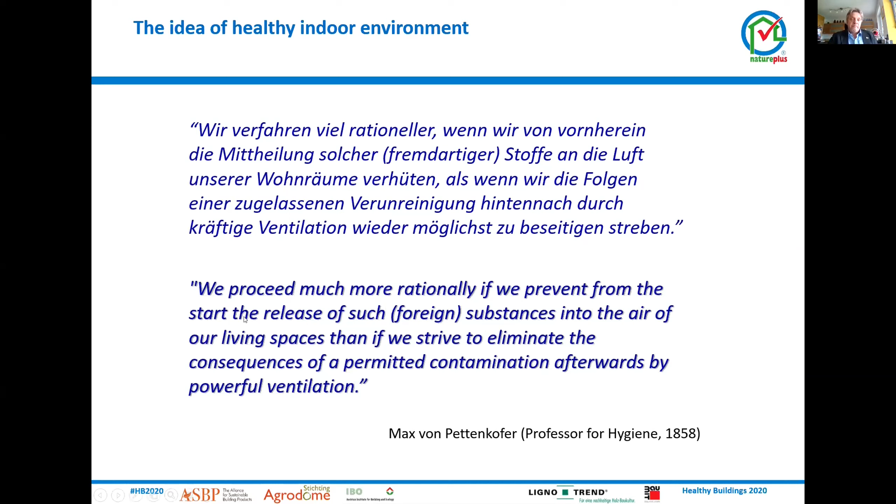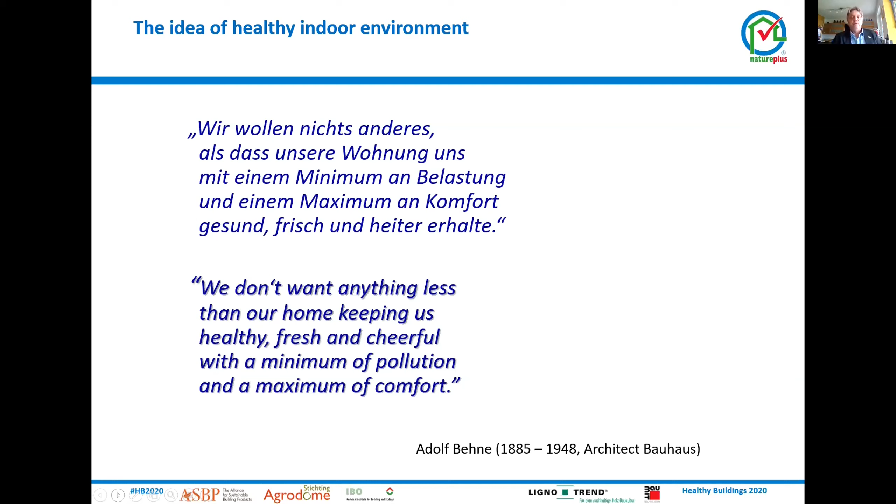So what kinds of pollution can be in our rooms? Main factors for the lack of indoor air quality can be chemicals. These are mostly volatile organic compounds. We have many lightly volatile organic compounds coming from paints and varnishes, for example. But we also have suspended particles as dust, and we all know that particulate matter coming from streets and from cars and from fire stoves is a problem too.

Radon is something which we do have in Germany, especially in certain areas, and it comes mainly from natural sources out of the earth. Microbes can be a problem, bacteria, of course, viruses, we all know that at the moment, and this is driving us very hard, but mold is another thing which can be indoors as well. Pets and pests, of course, we do have pets, and we have pests being a main source of allergens.

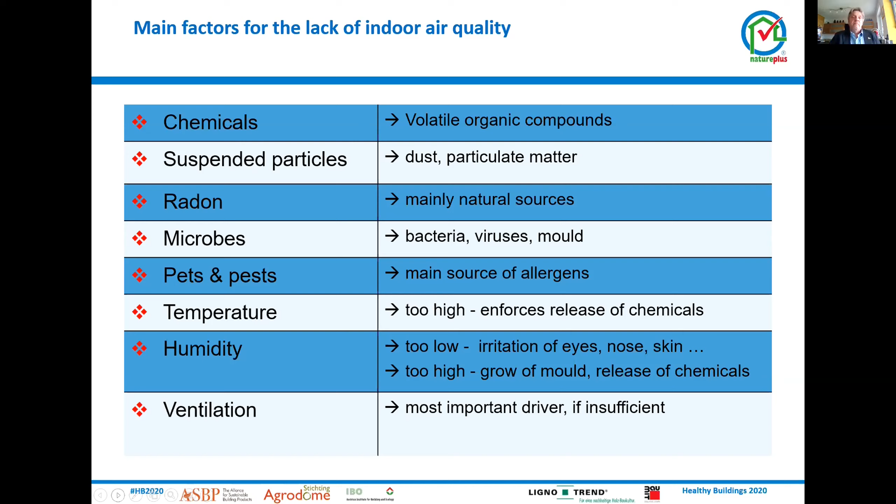Temperature and humidity are driving forces to increase the release of chemicals out of building materials. And if humidity is too high, we can have growth of mold as well. Ventilation will be the most important driver. If it is insufficient, we will have an increase in all factors of substances which are not good for indoor air quality.

Next slide, please. So what is going to be done to increase good indoor air quality? We will have to identify building materials and substances and interiors which are good for a healthy indoor air quality. We need to identify them, we need to have appropriate information on the contents of these products. We need to know what is inside a product, in furniture, but also in the building material, to know whether it can harm our indoor air quality.

Instructions have to be given on measures, how to apply substances and use the products. And we need to ensure that during construction, modernization, or refurbishment, well-trained and experienced craftsmen are dealing with that. From my work, I worked for a consumer agency in the past. We always had people coming to this organization saying, okay, there were painters in our house, and afterwards we have problems with our indoor air quality. So applying the product in a right and good way needs well-trained and experienced craftsmen.

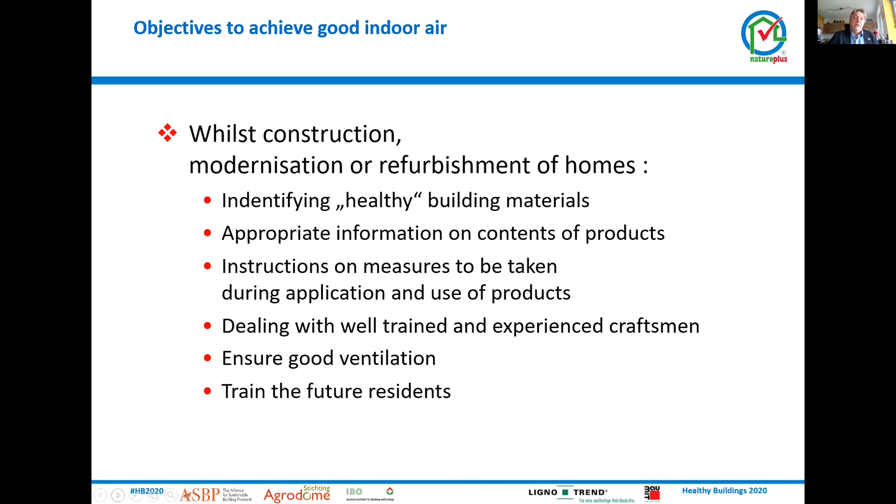So I'm sure, due to the better insulation of our homes, we need to ensure good ventilation. We heard that especially in the Corona crisis as well. Even now, getting to winter times, we need better ventilation of our homes and indoors, because the virus will be less available if we have better ventilation. And of course, residents and users of homes have to be trained how to deal with good ventilation and how to deal with the products they are using. Next slide, please.

Reality bites, what do we have? We always find polluting building products. We still have non-identified smells making people conscious that something is wrong in their own home. We do find proved contaminations in homes and in working places, and of course, due to these contaminations, there will be health risks. We still find inadequate product information so that people misuse products in a wrong way, and we have a lack of knowledge in the use of products. I spoke of well-trained craftsmen, but not always do we have these, and in the end, the citizens and users of the homes haven't got the right information to deal properly in their own homes.

So what is building products and probable pollution? We will see that depending on what kind of product you apply, there is a higher probability of having high emissions. So the bigger the surface and the more chemicals inside, the more probable the pollution. Textile floor covers, paints, and varnishes have been the most relevant indoor air quality problematic substances.

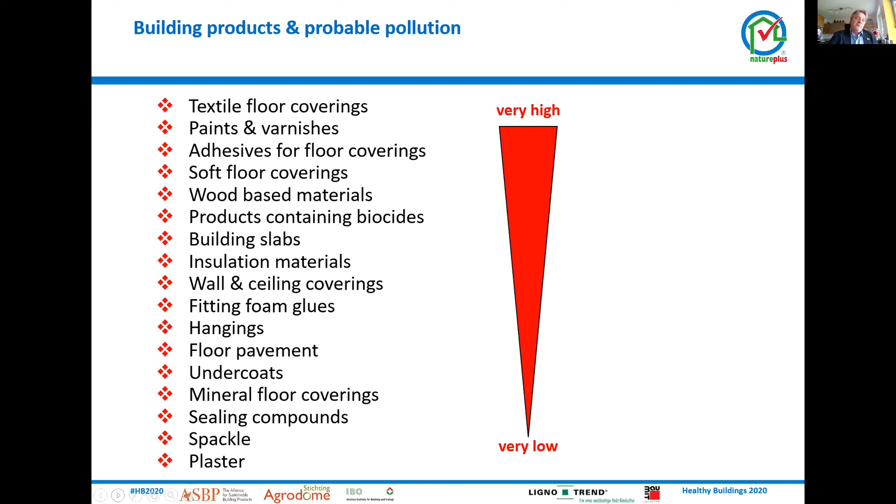So what about smells? People mostly identify that something is wrong in their house by a kind of unidentified smell. Chemical smells are always combined with the idea that it might be dangerous, while the idea that natural smells are healthy is not always true. But what we all know is that smells can influence well-being. Smells are the reason for rejection of products and for rejection of staying in a certain room. Smells are, as we've learned as human beings for a long time, mostly signals for danger.

But we should know that initial smells in the building environment are to some extent unavoidable, meaning we need certain time to ensure that smells can go down before we have constant living in those rooms. Olfactory pollution is recognized today as an important matter.

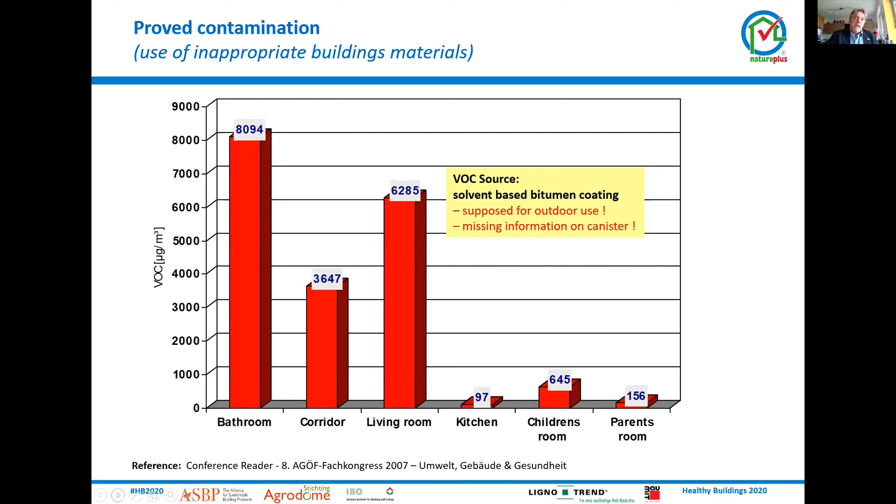Health risks are often combined with inconvenient smells. They cause sometimes non-specific symptoms, so because of the smell or because people are not feeling well, they get headaches, nausea, drowsiness, or irritation of the mucous membranes. Allergic reactions are caused by biocides, for example, but also by other products.

Long-term effects are seldom, but if they are, they're mostly connected with biocides and flame retardants in the past, because flame retardants are mostly chlorinated or brominated substances which are toxic. The problem of fear is mostly something people have if they find something inconvenient in their own homes. Fear is a main driver of a health problem.

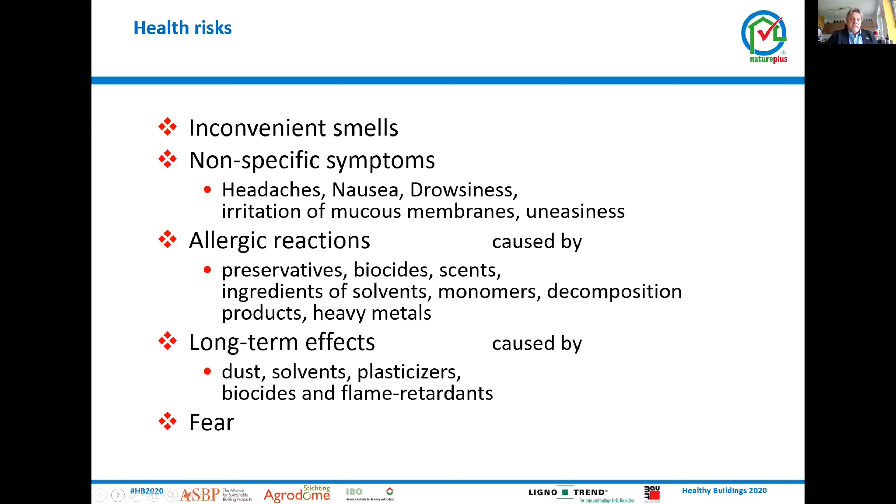During the use of building products, we have certain factors which provide pressure toward using inferior quality products. Cost pressure is something which might lead to indoor air quality losses because the wrong products are used. Time pressure and failures in construction might release substances, and the residents are not dealing well with the new environment. So if rooms are better insulated, you need more ventilation methods.

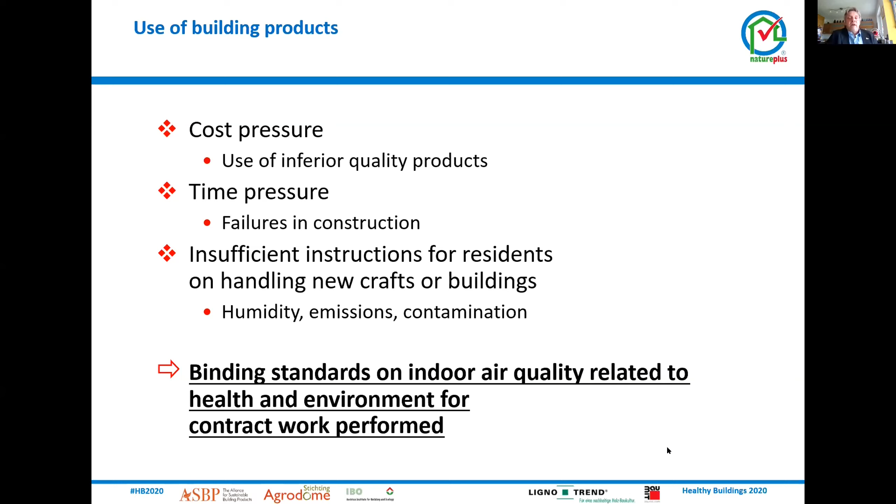So what we need are kind of binding standards for indoor air quality related to health and environment, and to include that in the contracts of the workers as well.

Product information is something which is very important. We need adequate product information so that indoor air quality problems will not appear. Safety data sheets are normally not suitable for risk assessments because people don't understand them. So the main thing is, producers and retailers need to provide precise, comprehensible, and action-oriented information to ensure health and environmental protection.

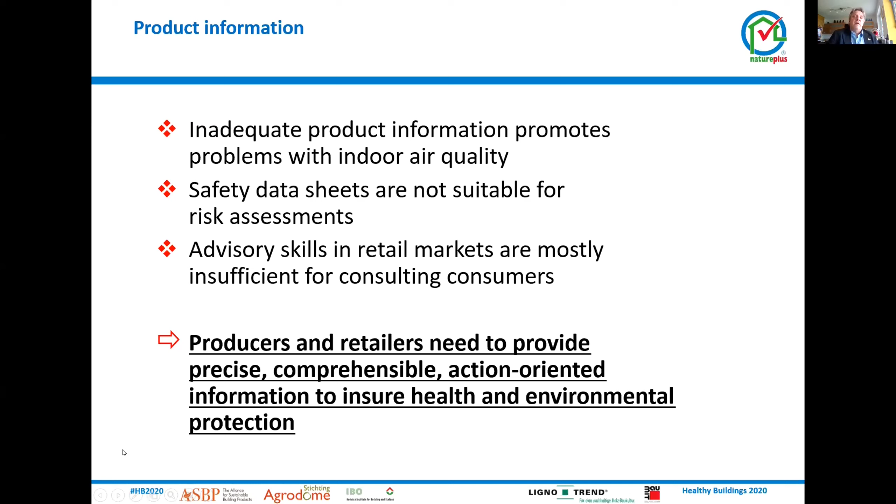So what is needed to improve indoor air? We need a comprehensive range of low-emitting building products. We need target-group-oriented information on the risk of indoor pollutants and appropriate avoiding measures. And this might be, or is, one step ahead.

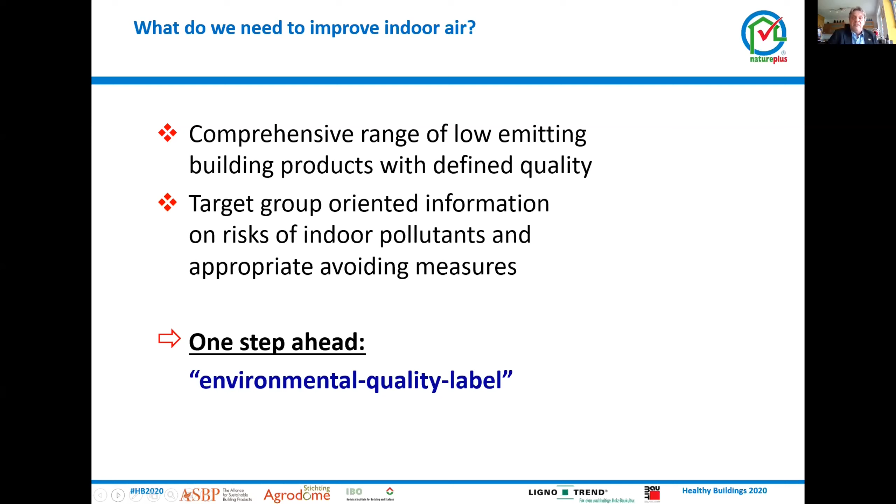A good environmental quality label will have a combination of good quality aspects, will have obligatory qualities, will have easy access to the criteria of the awarding scheme, will have reviewable and transparent criteria, will have regular verification of the users of the label and the products they provide, and will have continuous improvement of the criteria used for this quality label.

Next slide, please. You've got 5 minutes left. Yeah, but I'm shortly before finishing my talk.

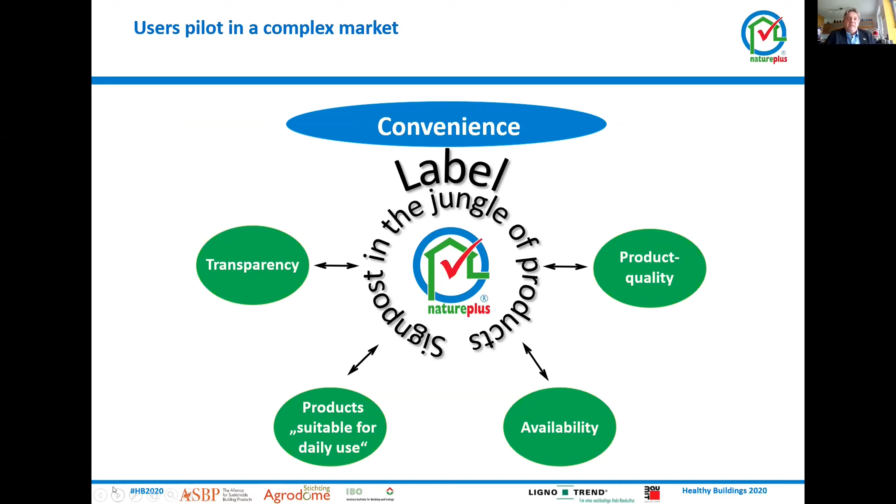Naturally, I think natureplus is one of these labels giving a convenient approach to transparency, product quality, finding products suitable for daily use, which are available on the market. Next slide, please. Thank you for the attention. So I hurried a bit, maybe too much.

No worries. Thank you very much, Dr. Buschmann, for your comprehensive overview of what healthy living means and what it includes.

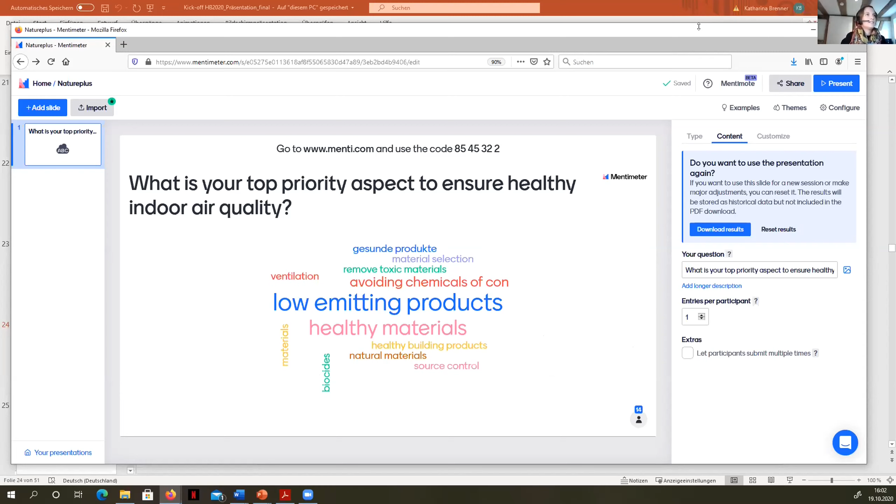It looks very good. I think that's it for the moment, but feel free to still participate. We will download the results later and include them in the presentation you'll get afterwards. As you see, there are many different aspects like ventilation, biocides, materials, healthy materials, healthy products - materials are a big topic, but also source control, which is interesting. Thank you, that's a nice overview of what's important to you.

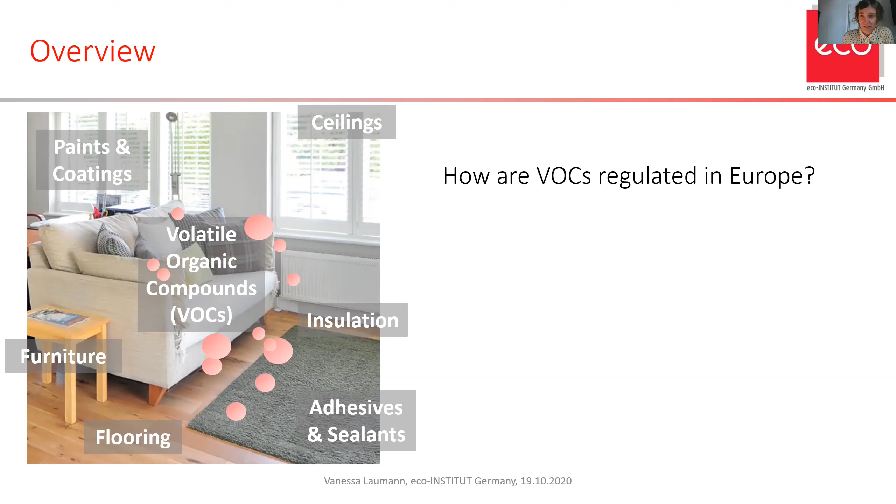Pollutants in the air have an immediate impact on health, as we already learned. So the quality of indoor air is of great importance, especially when people spend, in Corona times, maybe more than 90% of their time indoors. In the previous presentation, we learned that a major source of indoor air pollutants are building products like paints, flooring, and furniture. A major class of indoor air pollutants are volatile organic compounds - chemicals, for example like formaldehyde, that can emit from building products. In this presentation, I'd like to give an overview of product emission requirements in Europe and also in France, Belgium, and Germany - how VOCs are regulated. In the second part, I'd like to explain how product emission testing works - how we measure indoor air pollution.

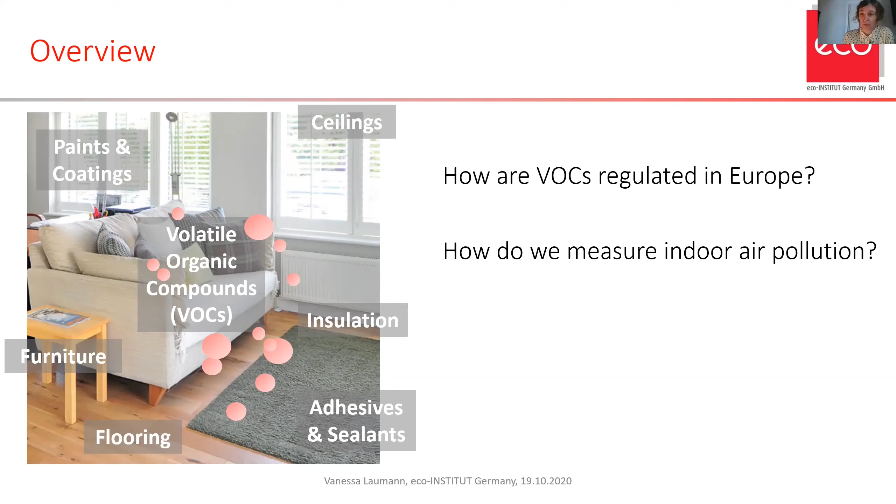A large number of countries have regulations and voluntary labels to protect us from harmful product emissions and improve indoor air quality. The European Construction Product Regulation aims to remove barriers to trade within Europe and sets requirements regarding safety. It lays down basic requirements for construction works, which must be built so they will not threaten health. In particular, emissions of dangerous substances and volatile organic compounds are mentioned, but the regulation is merely a basic framework.

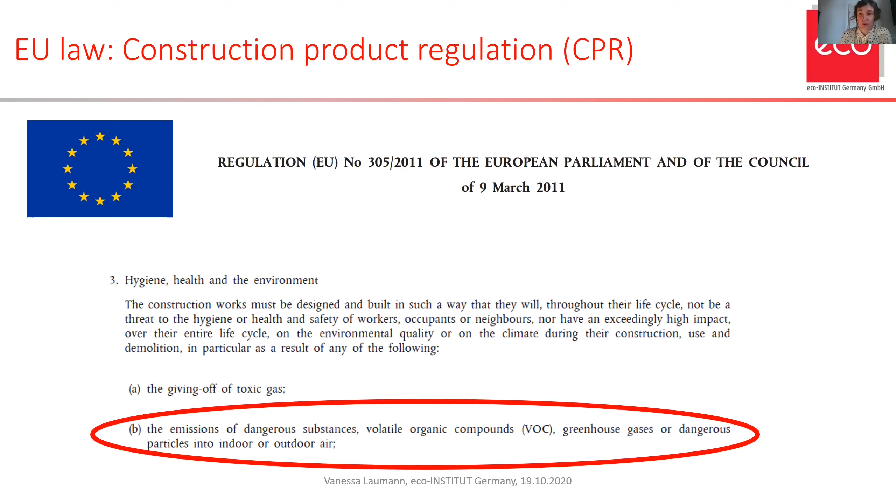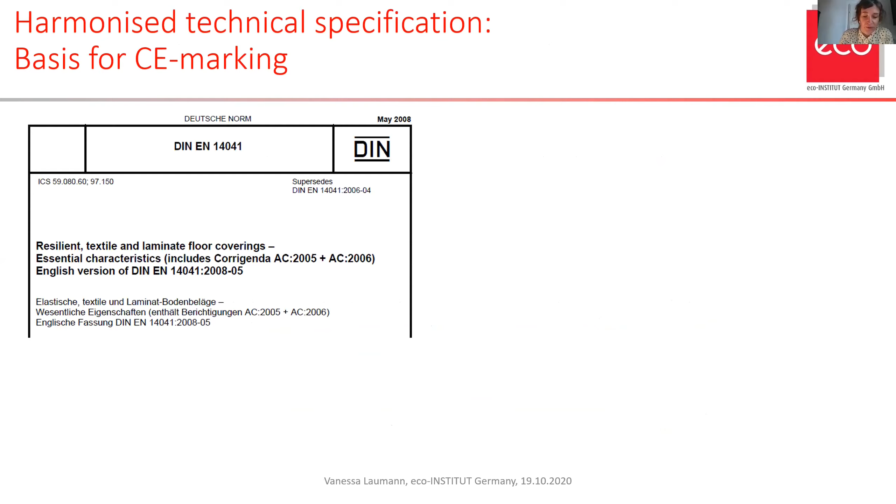The technical details for construction products are elaborated in harmonized technical specifications. Here's an example: DIN EN 14041 lays down the requirements for laminate flooring products. This is the basis for CE marking for flooring products in this case.

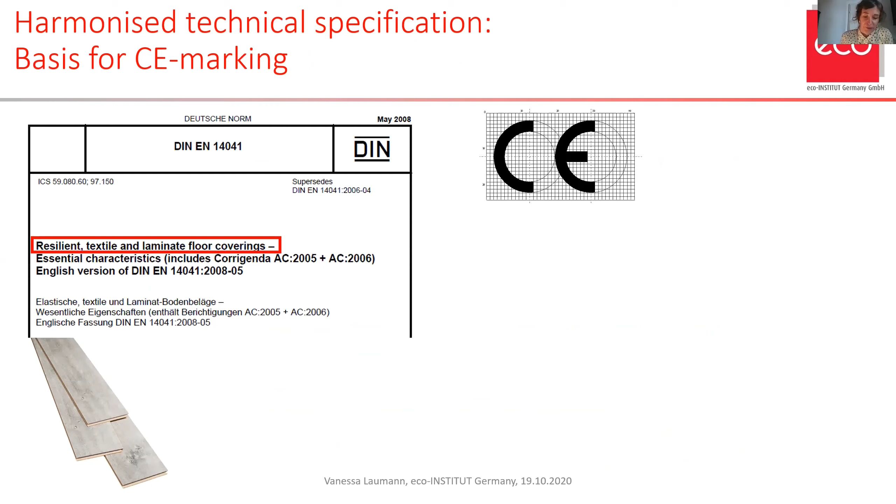For CE marking, the manufacturer always has to declare the essential characteristics in a declaration of performance. Here's an example from a manufacturer.

The CE marking is in most cases a manufacturer's declaration that the product meets EU standards for health, safety, and environmental protection. Only in some cases is assessment by a notified body required.

When it comes to emission requirements for laminate flooring products, there is only one limit value for formaldehyde that must be met and declared. The performance of other VOCs cannot be declared here.

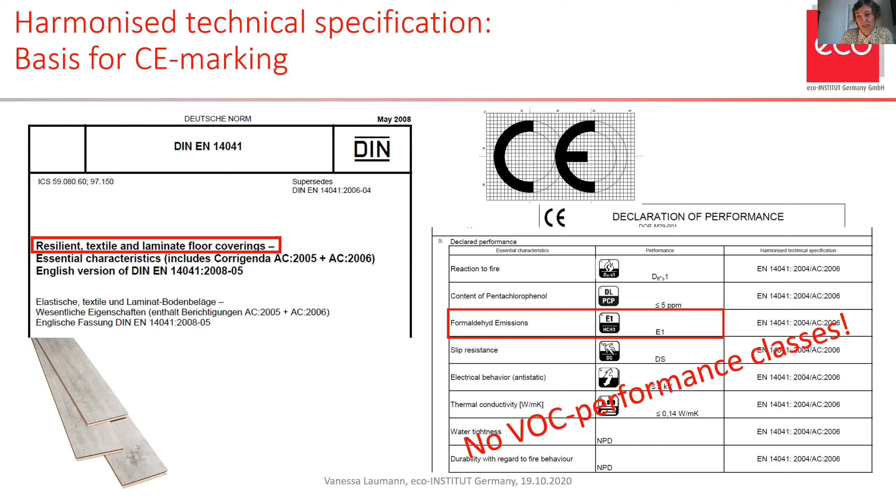So there's a gap in the CE marking standard. The declaration of performance for CE marking does not integrate health and environmental protection adequately. The declaration of comprehensive VOC emission performance is missing.

But for several years, almost all EU countries have been keen to get performance classes for indoor air emissions derived from harmonized reference values. For different products to be comparable, the VOC emission performance must be based on the same testing procedure.

In January 2018, so recently, a harmonized European method for the testing of emissions of volatile organic compounds from construction products in indoor air became available. The name is DIN EN 16516. And a recognized number of testing laboratories are already in place.

So a harmonized testing method for evaluation of VOC emissions is available and is planned to be adopted within the harmonized standards of CE marking.

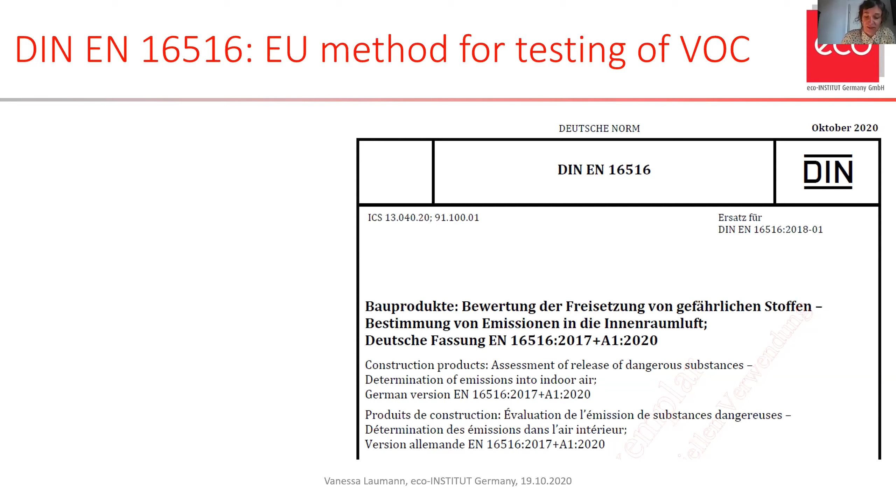But what is still missing in the CE marking and the corresponding declaration of performance is the definition of a common declaration format for VOC emissions.

The European Commission is currently working on a new classification system for rating of results of emission tests.

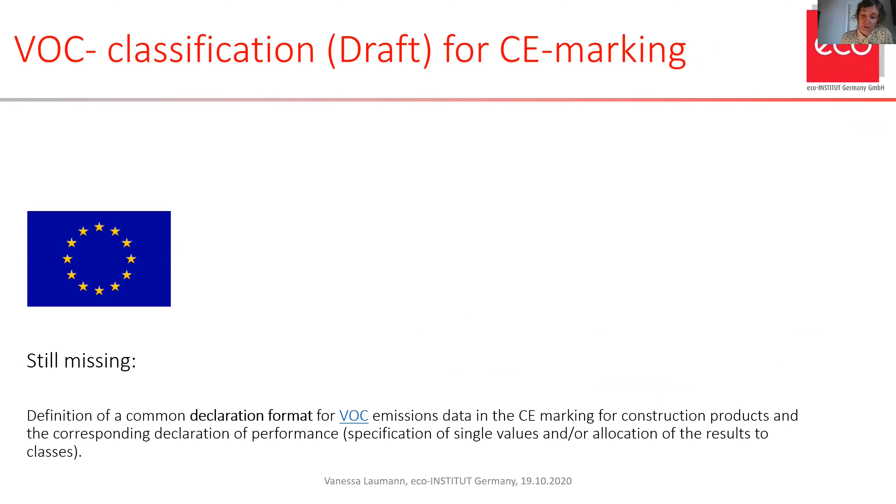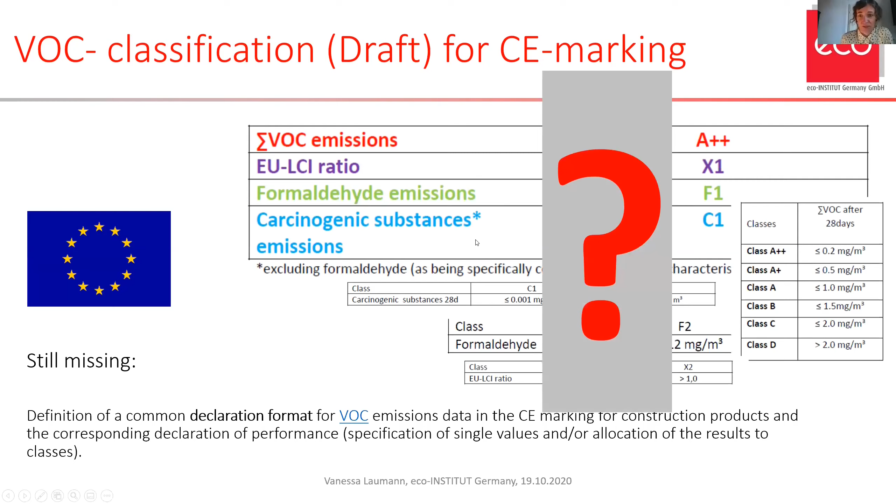It still has to be decided whether the manufacturer needs to allocate the emission results to classes - here, that was a draft, an example - or just specify single values. But it has not been decided yet.

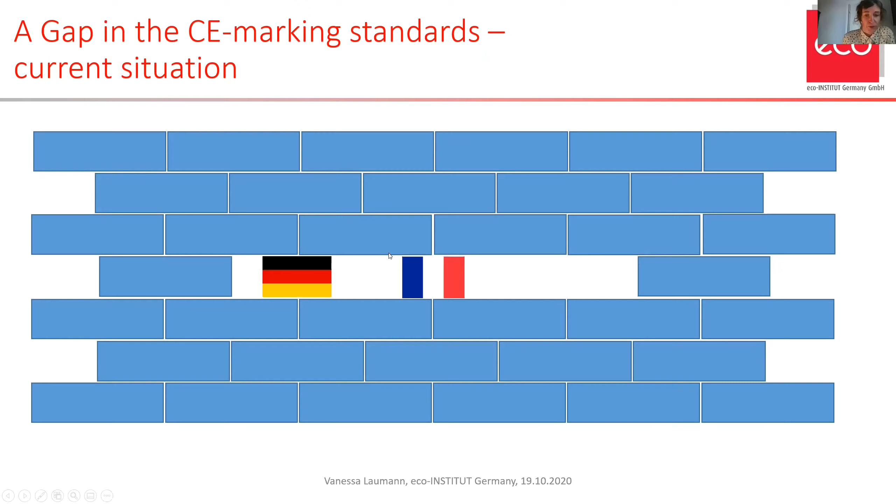So still, there's a gap in the CE marking standard. But three countries, Germany, France, and Belgium, already have VOC regulations in place. These already refer to the test method EN 16516.

Additionally, several voluntary eco-labels already refer to the test method, but requirements and limit values differ substantially.

Germany was one of the first to limit the amount of chemicals that can be released from products. Laboratory tests have to be performed according to the European emission testing method, and the so-called AgBB scheme sets the limit values.

Here's a list of certain limit values. For example, the sum of VOCs has a limit value, as well as the sum of semi-volatile organic compounds.

Formaldehyde has a limit value, and carcinogenic substances are limited. Just examples.

Some product types require an external audit, additionally, of the factory, and a sample is taken in order to control VOC emissions. These products need to be labeled with the Ü mark.

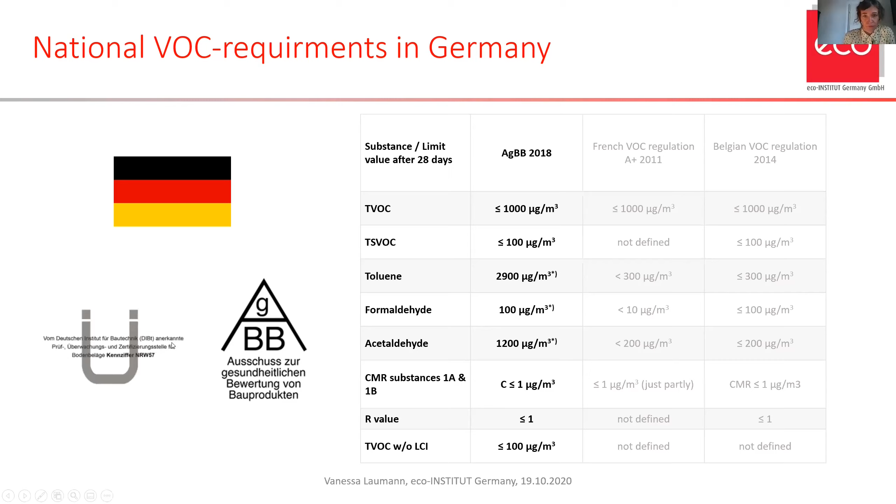The French regulation is a labeling scheme from A+ to C. A limit is set for the total amount of VOC.

You can see it in the table. And in addition, just 10 single substances are evaluated.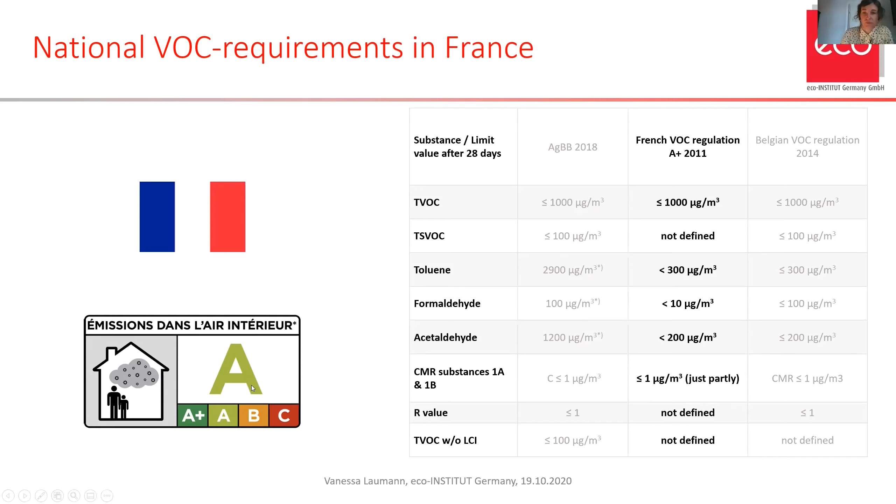The third VOC regulation in Europe became mandatorily effective in 2015 for products to be traded in the Belgian market. Emissions are evaluated after 28 days, and the evaluation is similar to the German AGBB scheme.

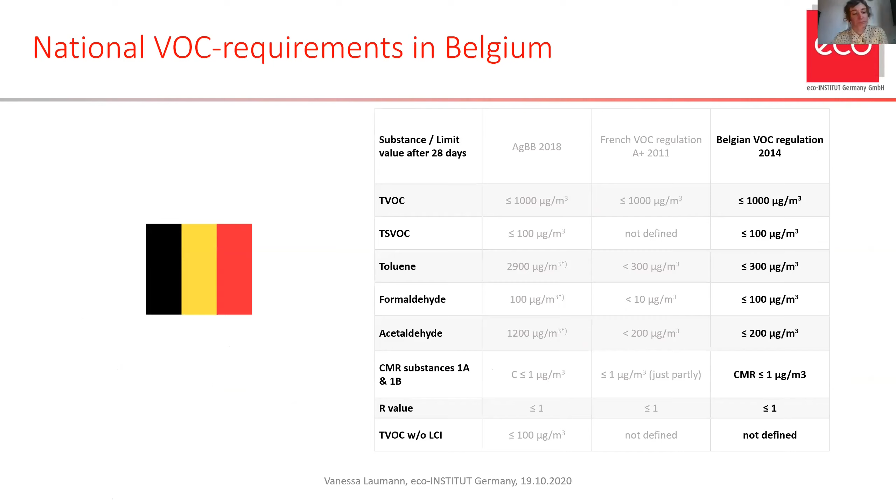In comparison, the natureplus VOC emission guideline sets limit values for a long list of substances and substance classes. Don't be frightened.

In addition to the German AGBB requirements, for example, there are limit values for individual substances derived from indoor air guide values. These are established by a scientific working group in Germany.

Another example is the limit value for formaldehyde, which is much lower than legally required.

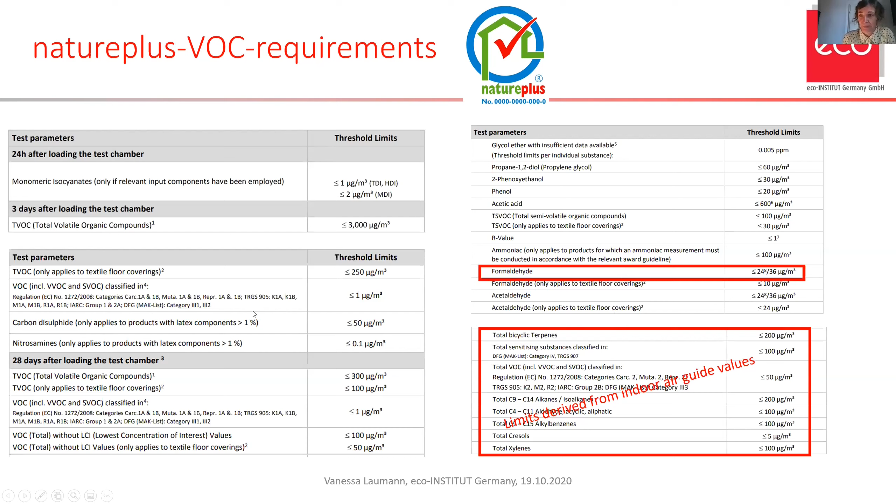So here comes the second part: how do we measure indoor air pollution? And especially, how do we measure emissions of volatile organic compounds from construction products in indoor air according to the European standard?

At the Eco Institute in Cologne, we have 120 test chambers made of stainless steel and glass. Most chambers have a volume of 125 liters, but we also operate larger chambers up to 20 cubic meters for large items, such as furniture.

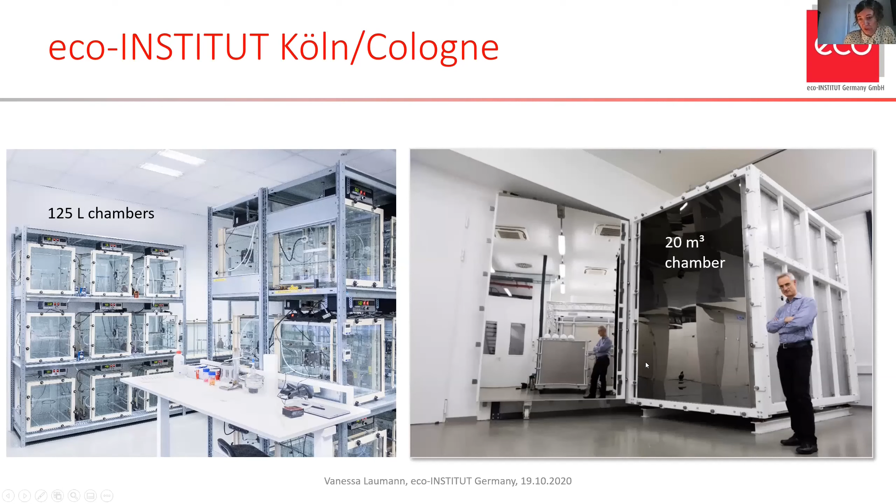In the test standard, a reference room with a volume of 30 cubic meters is defined. The floor, for example, has an area of 12 square meters.

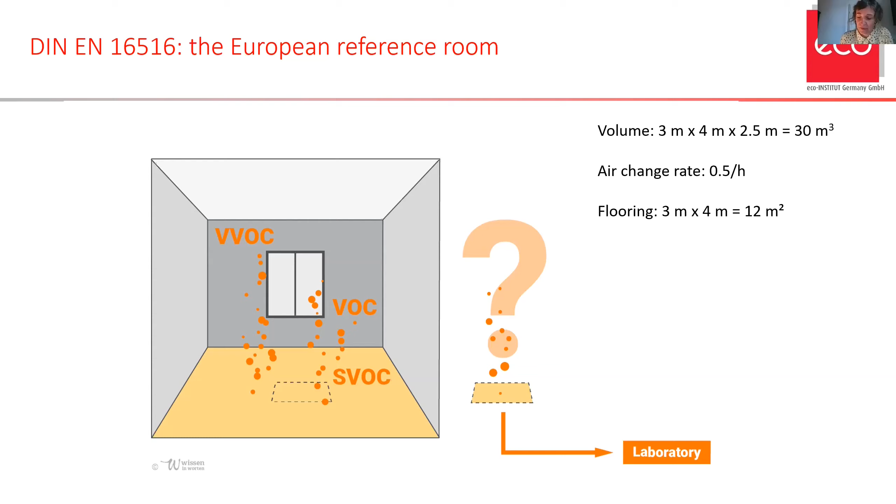The test specimen must be representative of the product to be tested. So what happens when a flooring product comes to the laboratory for analysis?

A test specimen is prepared and placed in the test chamber. Here's a picture, and that's the model. The size of the test sample is aligned to the size of the material in the reference room.

In order to simulate a model room, all chambers are fed with air that is cleaned of all impurities and maintained at a standard temperature and humidity.

The emissions from a product will change over time. Typically, a test run is 28 days. There are two measurement time points.

After 3 and 28 days, air is collected on the sampling tube that adsorbs the volatile organic substances.

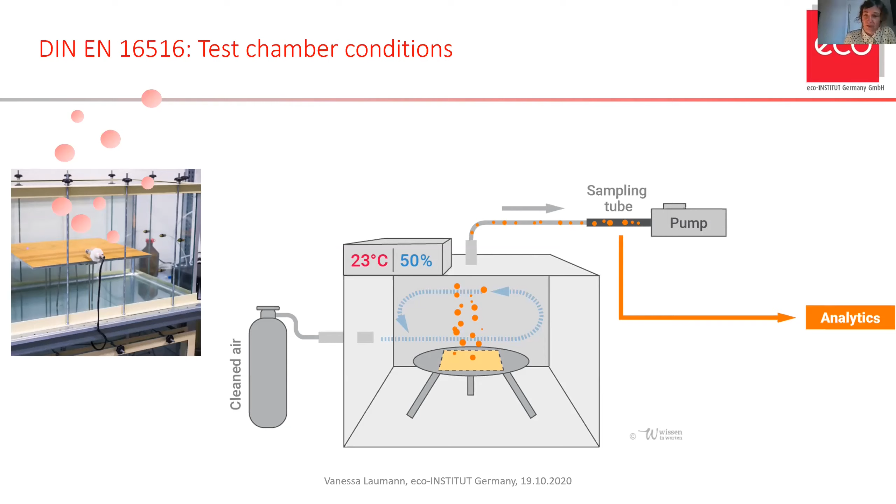Chromatography analysis separates the collected substances. A gas, for example helium, carries the mixture of substances through the thermal desorber and afterwards through the separating column of the gas chromatograph. In the heated separating column, the VOCs are separated.

Some substances migrate faster, some slower through the column. The column is a thin tube, up to 100 meters long, made of coated glass fiber.

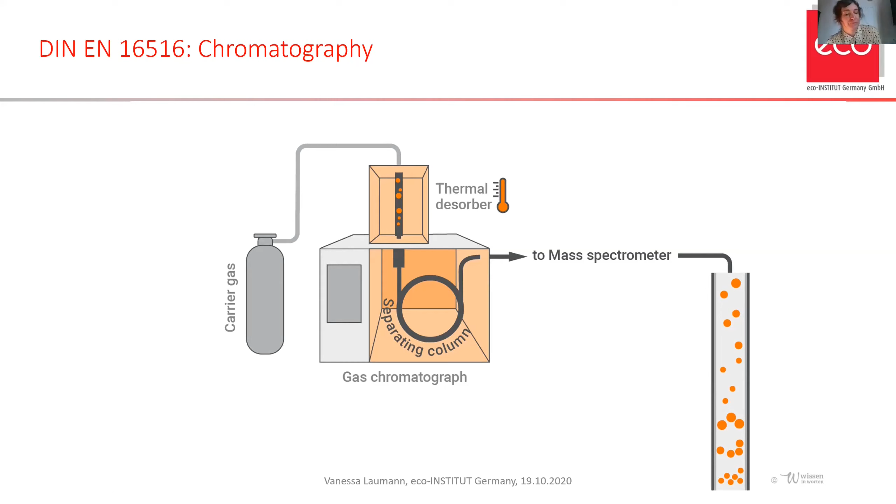Mass spectrometers identify the name of each substance. Validation and quantification is carried out by our analysts.

Test reports provide a summary of test results. You get a list of individual substances with their indoor air concentration.

Reports can also declare compliance with standards like the French, Belgian, or German regulations I talked about before, or voluntary labels like natureplus.

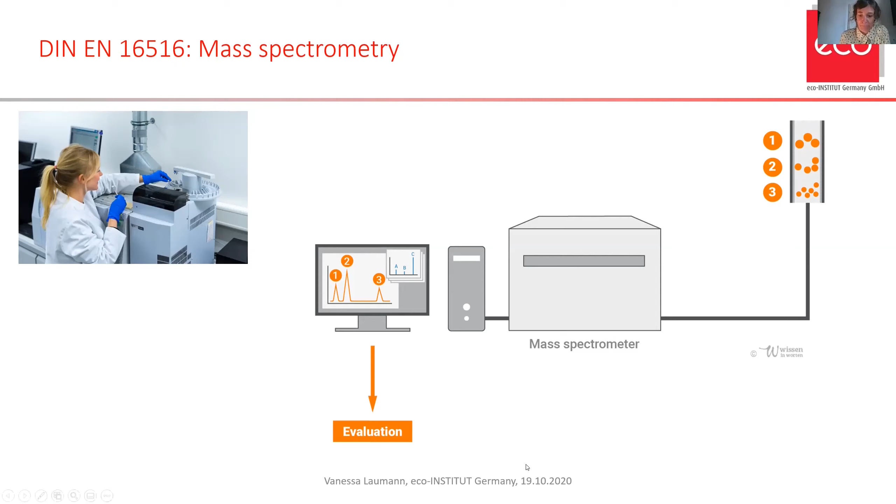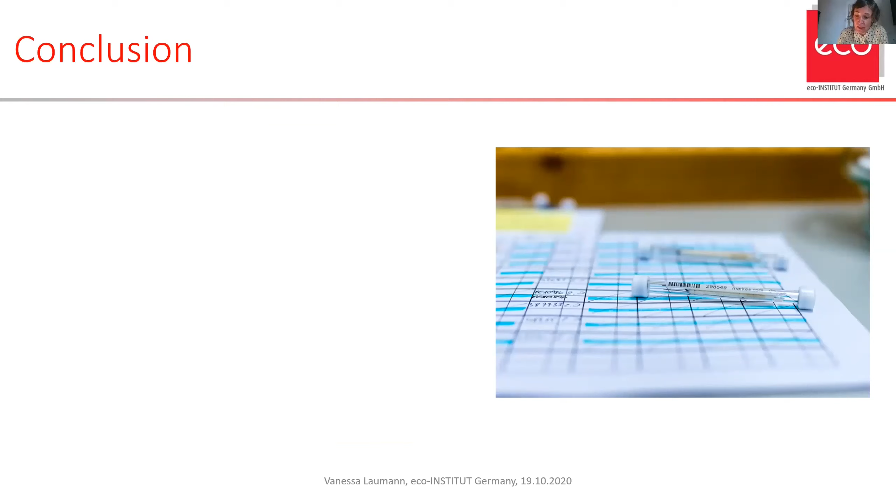So with this, I'd like to conclude. How do we ensure indoor air quality was the question. Product emissions testing, according to the European test method, provides information on the VOC emission performance of construction products.

Three countries have already put regulations in place based on this test method, and the method is already the basis for a number of quality labels.

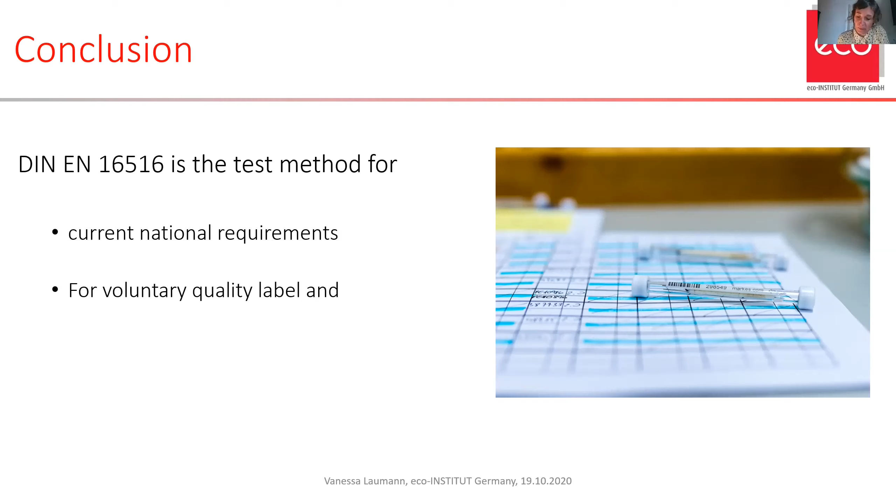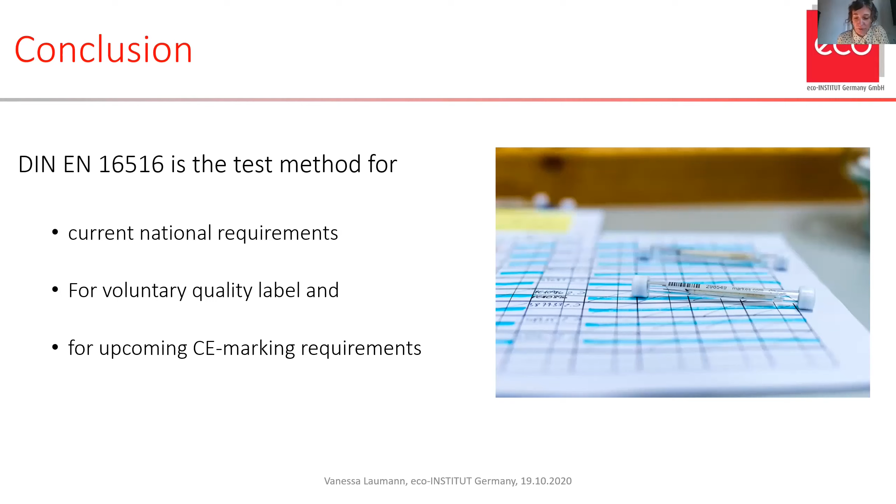And finally, the test method will be adapted within the harmonized standards of CE marking in the future. This helps to ensure healthy indoor air. Thank you very much.

Thank you very much, Mrs. Laumann. Thanks for this insight into the fascinating world of norms and testing and how you actually test all these abstract things and regulations. Thank you. All right, now relax, audience.

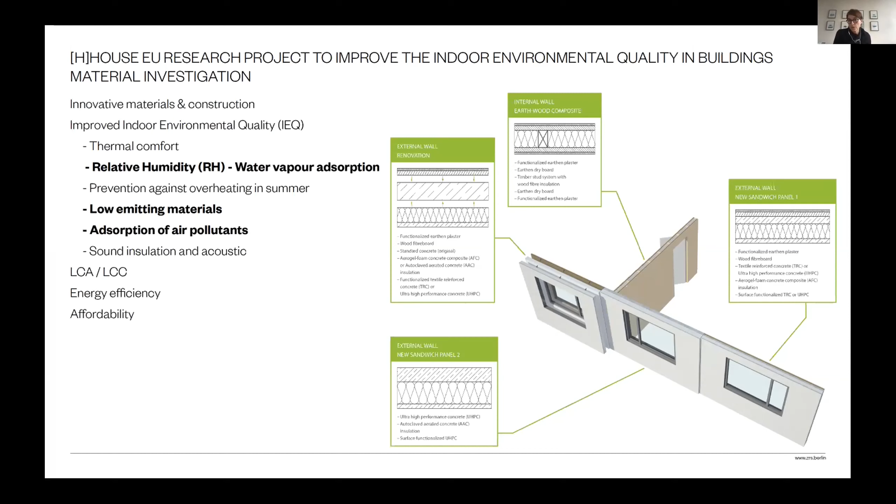The [H]HOUSE project was quite a large-scale project, and the topics I want to talk about today relate to relative humidity levels, as Dr. Buschmann stated already earlier, contributing to healthy buildings, low-emitting materials, and what we investigated as well is building materials that might be able to actually absorb pollutants from the air.

So the challenges we see as architects is that due to improved energy efficiency standards nowadays, which are essential in order to safeguard our planet, we have unforeseen problems, or we have more problems with VOCs, harmful substances, microbiomes in our buildings because of the very high airtight levels. The other issue that we were facing was that humidity levels indoors raised, but also airborne pollutants.

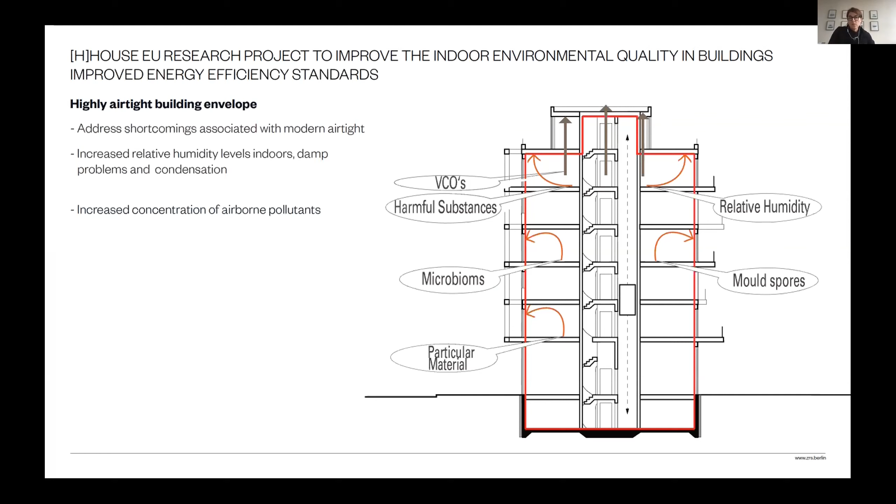So the reaction of the industry was actually to introduce mechanical ventilation with heat recovery in order to improve the indoor environmental quality. And this is where our expertise kicks in. We think that this mechanical ventilation, in certain cases, is required, but we see it also very critical because it dries out our spaces.

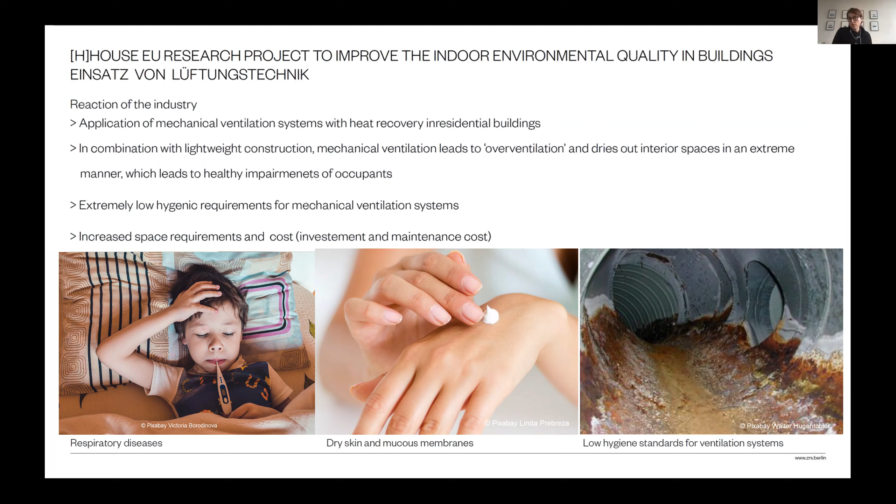We have made measurements that I'm going to show you also from one of our projects, and other scientists have examined the same phenomena in combination with lightweight construction, or if you don't use the right materials, in wintertime in a cold climate, you bring in 24/7 really dry air, and this is what dries the spaces out. The other issues are you need obviously space and cost for mechanical ventilation, and another topic is the very low hygienic standards of mechanical ventilation systems.

Just to explain this issue of relative humidity levels a little bit further, there are studies from Schofield and Sterling that were undertaken already in 1985, and they examined the interaction of microbiomes at different relative humidity levels. So basically what we have in our air is bacteria, viruses, fungi, mites, and so forth. And we can't avoid this. And at the end of the day, we shouldn't, because it's important that these are in balance. So we have good microbiomes and we have bad.

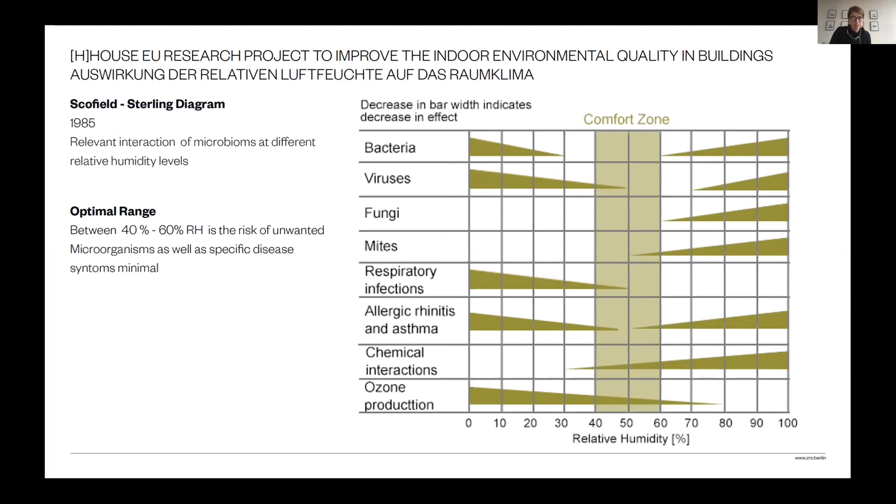And as soon as we interfere and start to clean everything with chemicals and so on, we really disturb this environment. The other issue that we see, as you can see in the graph, is that if the relative humidity levels either drop or are getting too high, you have a higher activity. So basically what we're looking for is a comfortable climate, a healthy climate of relative humidity level that ranges between 40 and 60%. And that's not always easy to achieve.

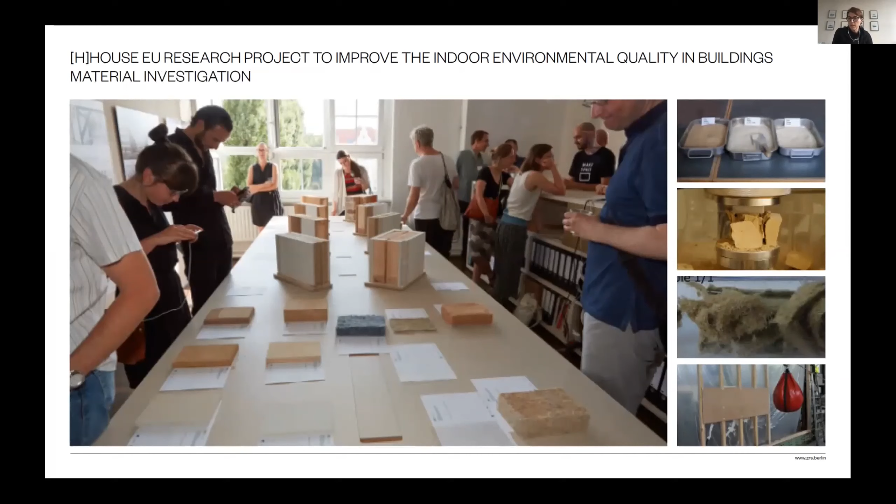So to show you a little bit about the research project, we did a lot of investigation of earthen materials, but also other natural building materials. We focused very much on internal partition walls. So we looked at every single layer that we need for constructing such walls. So the finishing layers, paints and plasters, dry lining boards like earth dry boards or cellulose boards, or it could be wood fiber based boards. We also looked at insulations, either to be used as internal insulation or as external insulation.

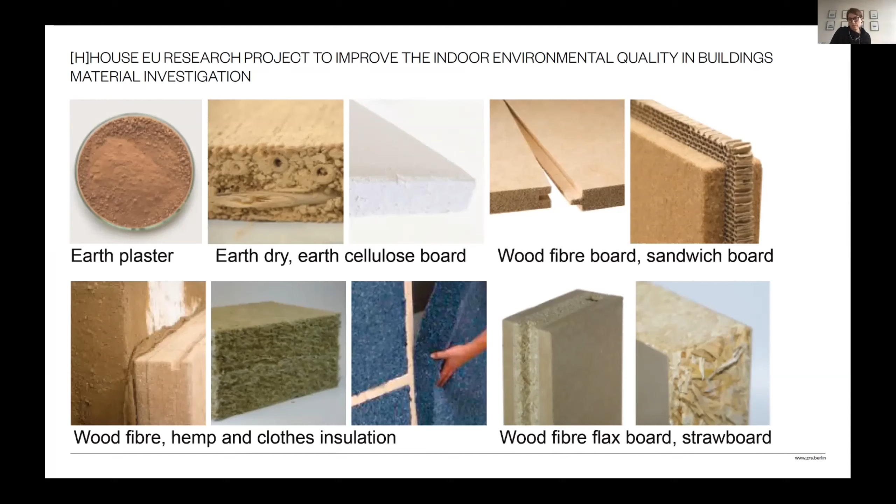And we looked at different modern products on the market for internal partition walls if you avoid the classical stud construction system, like these wood fiber, flax board or straw boards that you just bring in as a single board, that form the wall itself and will be plastered. What we did as well, but just with a few samples, we investigated also solid timber products like plywood and KVH products or cross-laminated timber, for instance. But this was just a smaller part of the project.

So what we did was emission testing because we obviously wanted to understand what are healthy or low emitting building materials. I have to mention this was carried out by one of the project partners, the Federal Institute for Material Research and Testing. They are also based in Berlin, and we had a very close collaboration. So what they did was they tested single materials up front as so-called screening emission tests through the means of gas chromatography, as Vanessa Laumann was explaining earlier, just to investigate what kind of emissions we have to look for.

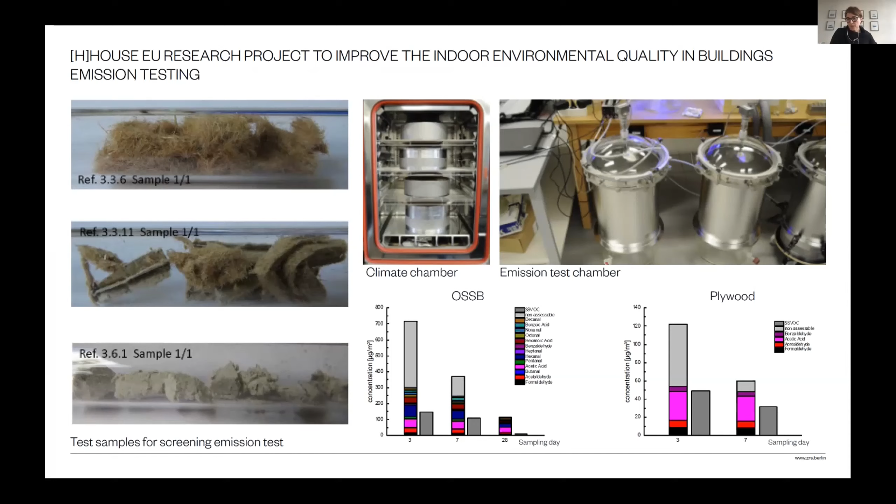And then we did larger scale tests. Unfortunately, we didn't have the European test room available, but this is a test chamber for one specimen, and it contains a fraction of this European testing chamber. And then we investigated VOCs, semi-volatile organic compounds, radon, and also formaldehyde.

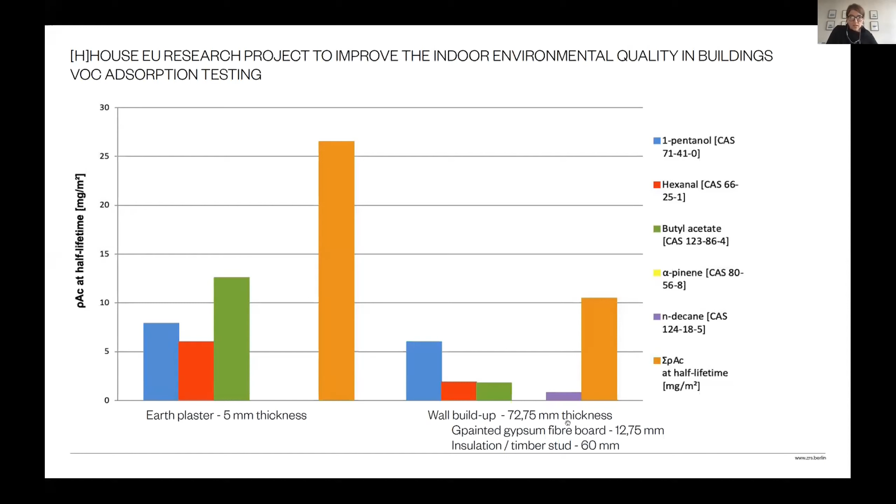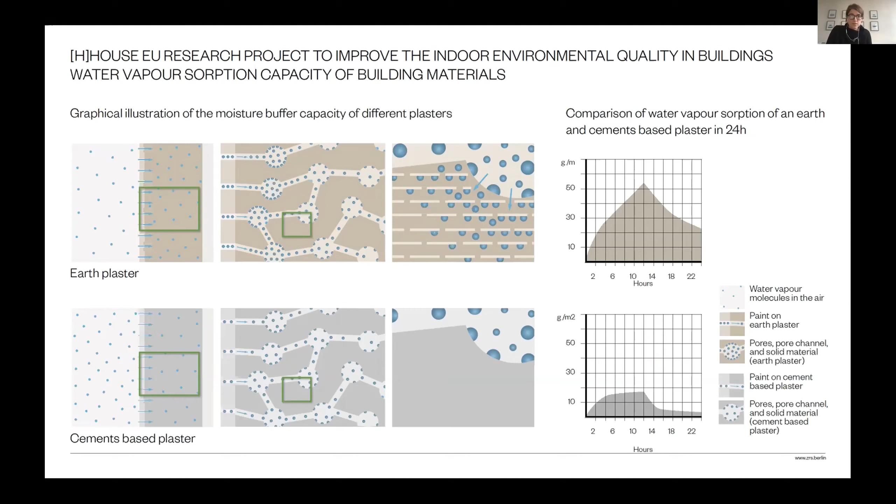And the blue dots always indicate the moisture that is in the air. And what we see here is that for the earthen plaster, we have less moisture in the air, but more moisture in the capillary system, because the surface of the earthen plaster is extremely large, which enables the material to adsorb water. And the other benefit that earthen materials have is they contain so-called three-layered clay minerals, indicated here, that are in addition able to absorb moisture. So this is something we use in practice to reduce mechanical ventilation and to generate really stable relative humidity levels in our buildings.

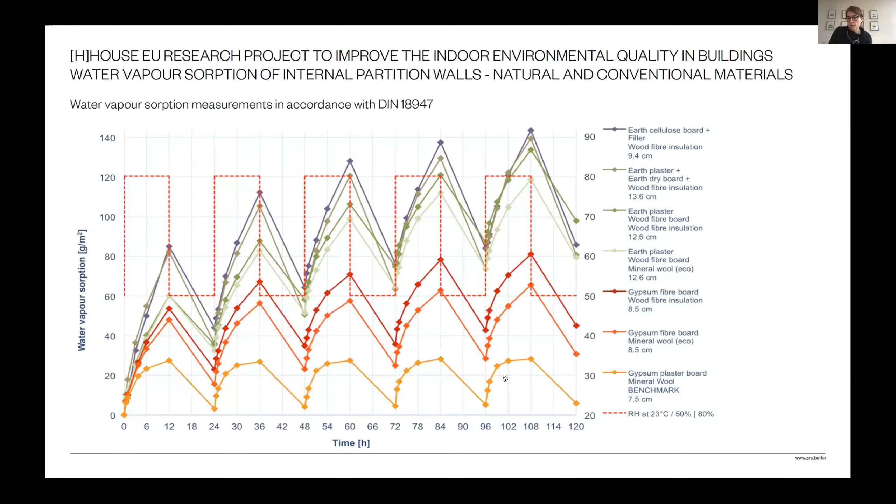We've investigated this also during the course of the project with water vapor sorption measurements according to the DIN standard for earthen building materials. And we investigated single materials, the materials presented earlier, so the plasters, the insulation layers, the wall lining layers, but also entire wall build-ups. And just to give you a quick summary of the measurements, the wall build-ups containing hygroscopic natural building materials like earthen plasters, wood fiber boards, and wood fiber insulations absorb up to 5 times more moisture in comparison to standard gypsum fiber products, for instance.

So this is basically just a brief overview of what we investigated in the [H]House project, and this forms the basis of our planning work in the architectural department. So what we start with is that we select low-emitting construction materials. There are always some form of emissions, you can't avoid that, but there are very good products that emit really just a little bit. And this was also the result of our measurements in [H]House.

Sorry, I think I forgot to mention that the emission measurements of all single materials and all wall samples were very, very good. We had only one wall build-up where the threshold value was too high. And this was down to a glue that was used in this specific wall build-up. So I think this was mentioned earlier. Glues are always a critical material. You have to be very careful with the selection in order to find a product that is really low emitting.

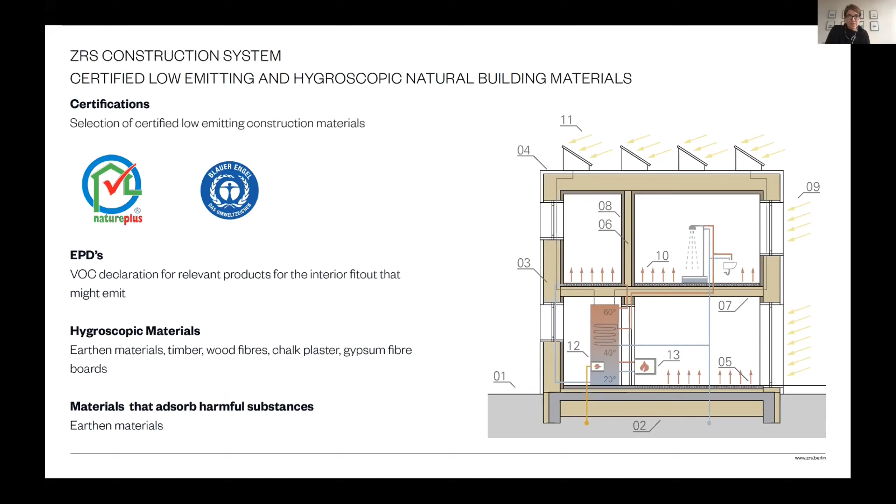And what we did was, this is quite an old project, so we had only a partial prefabrication in terms of the building envelope that was constructed in timber, but that was the standard at the time. Nowadays, you would bring in a fully prefabricated panel, but we used like a timber construction with OSB board as a stiffening layer,

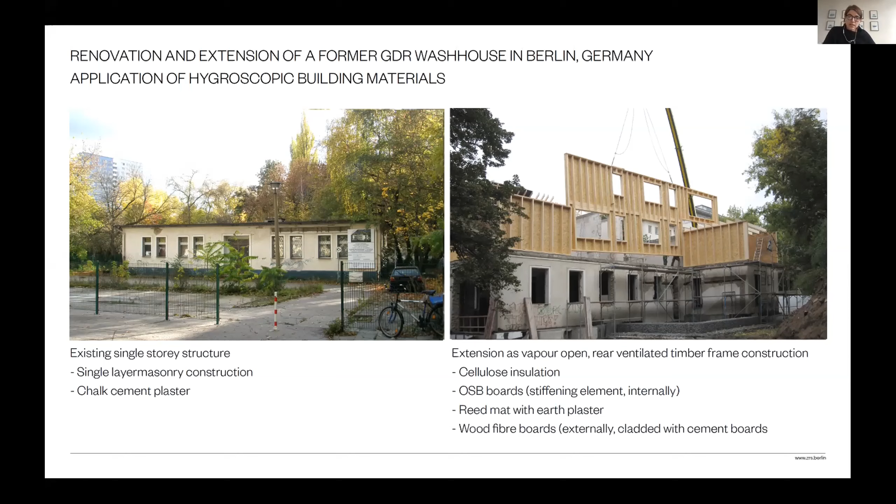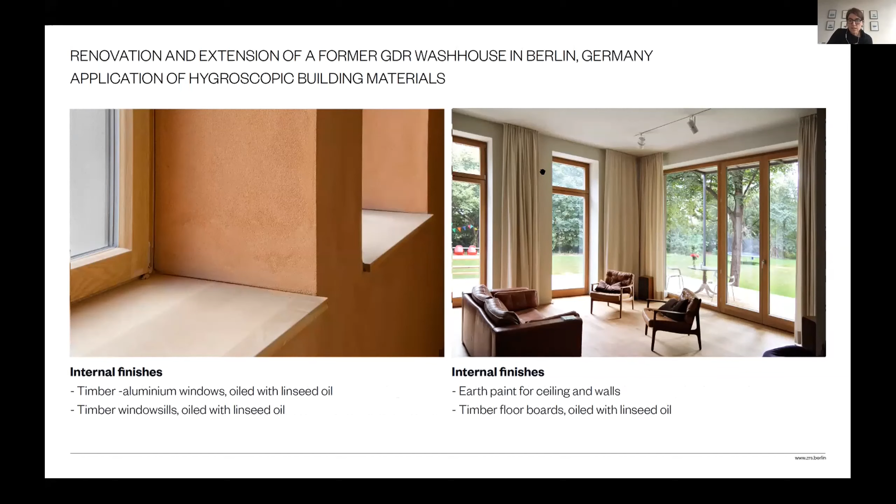Here again, we used timber windowsills that were only oiled, aluminium timber windows, again only oiled. So the vapor performance of the timber remains. And this is then the final flat, for instance, at ground floor level, where you can see the nice and modern construction materials. The house contains also apartments and single room studios, and all different apartments are naturally ventilated.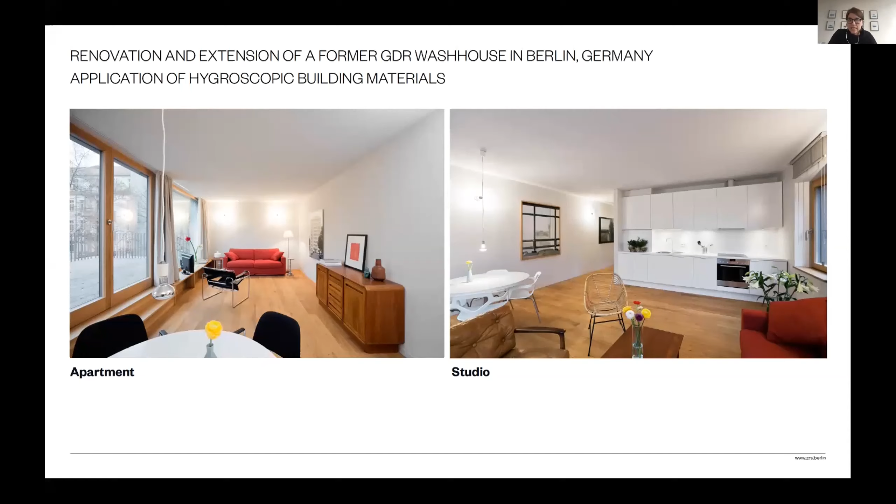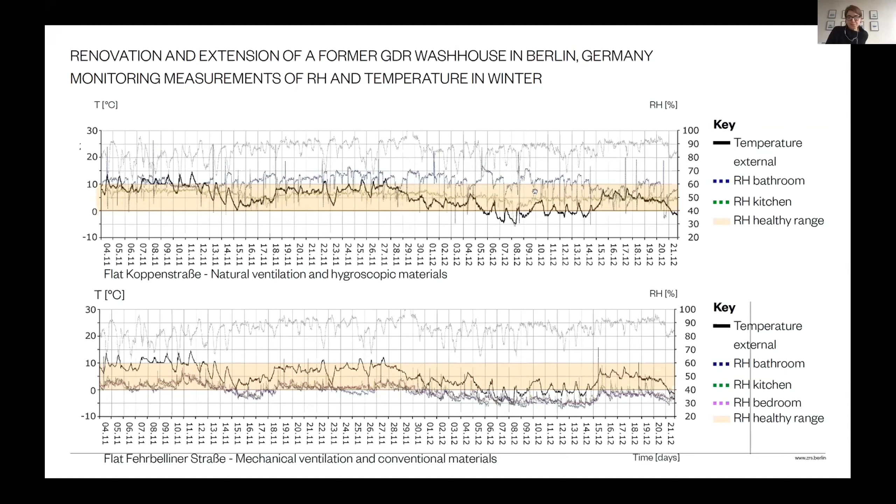And what you can see here in the other building is that the relative humidity levels drop quite significantly due to the fact that measurements were taken in wintertime. As I explained earlier, you bring in the dry air and you're not able to keep healthy relative humidity levels. Whereas here, this room was slightly too high. This was the bathroom. We informed the client, and other measurements showed now that they range always between 40 and 60%.

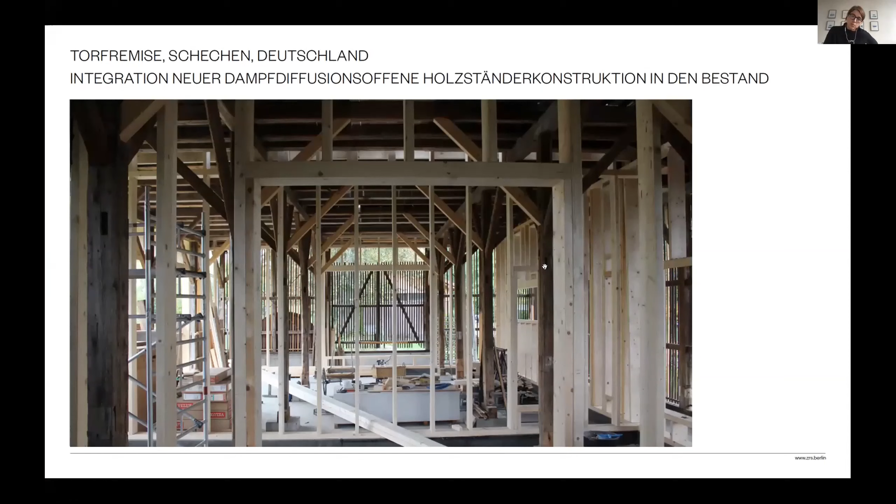This is another project. It's an old peat barn that was refurbished. Again, we worked with timber construction, so we have the old structure, but we integrated a modern building in that. And again, we used earthen materials also for the interior walls as insulation material, because we wanted to improve also the performance during summer. So we bring in high mass and a lot of absorption capacity.

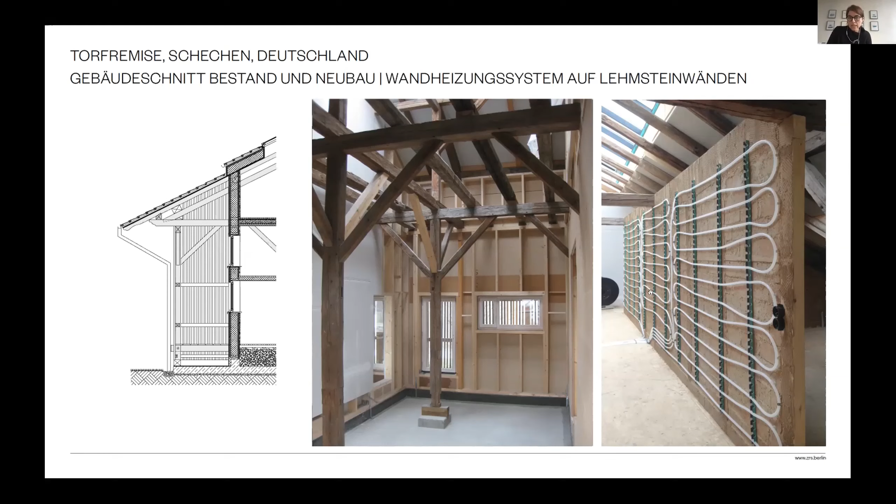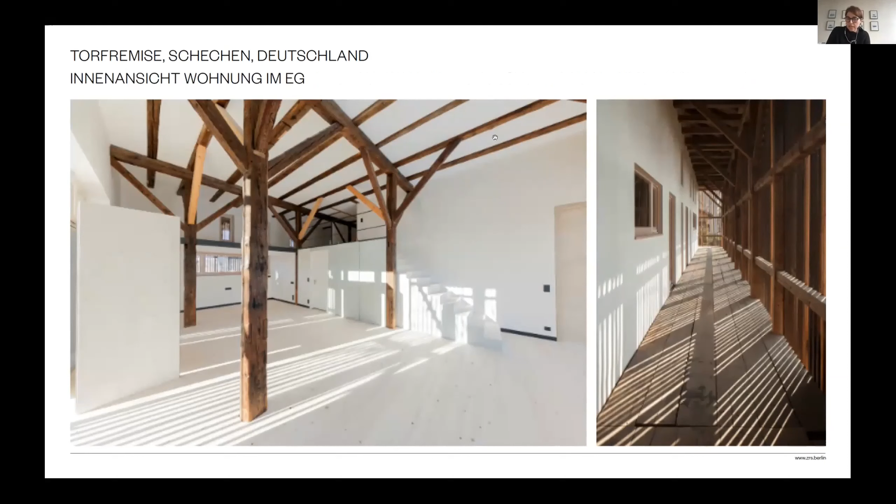Again, the building is naturally ventilated. We installed a wall heating system that you could also use for cooling. And again, we used timber flooring that is screwed, so you don't need to use glue. We have modern earthen plasters on the walls and also on the ceilings, and again, naturally ventilate the building.

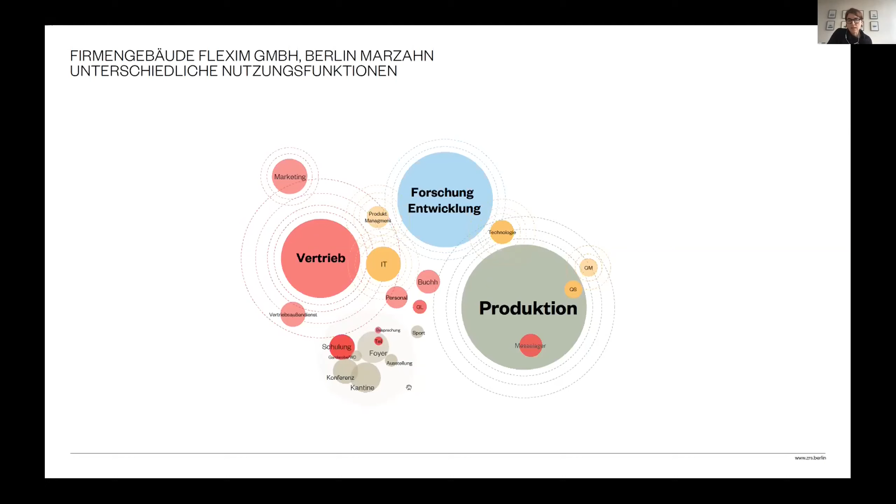So the last project I dashed through a little bit, we also scaled up this concept and brought it to Flexim. Flexim is a big manufacturer of sensors, and they commissioned us to construct a 12,000 square meter building. They have different departments, research and development, production, but also offices, marketing, whatsoever. And again, we applied our concept of low emitting materials with hygroscopic properties in order to be able to naturally ventilate the entire building.

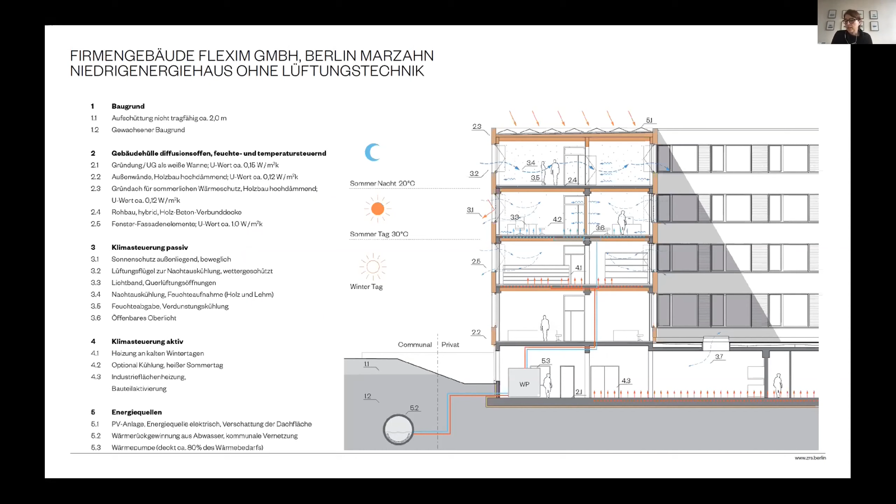We haven't done measurements, unfortunately. This was the plan, but it never came through. But the indoor environmental quality, from what we had as feedback from the client, works very well. But what would have been interesting is to measure emissions and also relative humidity levels, but unfortunately we didn't do this.

This might be interesting because we didn't use earthen materials due to cost constraints, so we were able to also achieve natural ventilation through the use of gypsum fiber boards. But as you can see here, we brought in a lot of timber because, due to the structural system, we had a concrete timber ceiling, a hybrid construction, and in the main public areas, we tried to introduce timber. Floorings were specified as certified tiles or carpets in the office spaces.

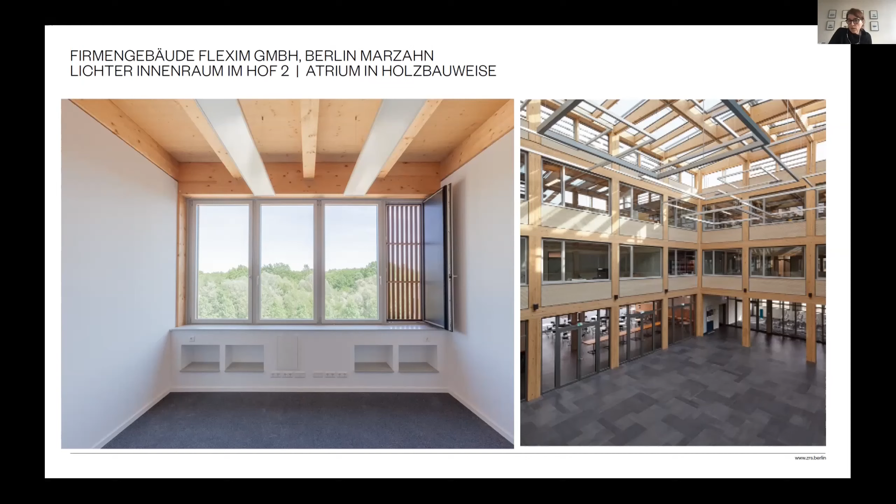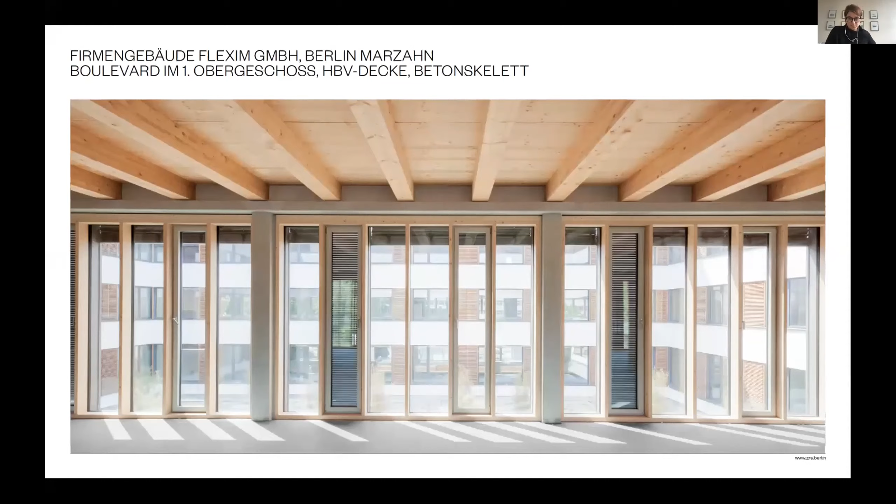And this should be it. Sorry, there was maybe a little bit of a rush towards the end, but I felt like the introduction for our way of thinking might be useful to understand in order to dive in a little bit more into our project. Thank you very much.